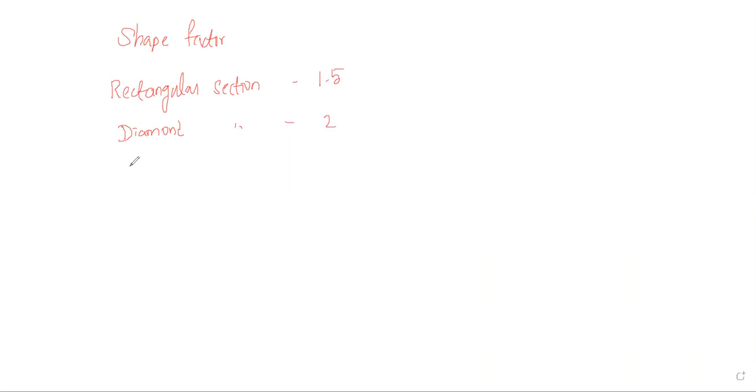Today we are going to discuss two things. One is related to shape factor. Yesterday we discussed the shape factor for three shapes. One is for the rectangular section, that is 1.5, and the second one is for the diamond section, that is 2. Then another one is the triangular section, around 2.34. Okay.

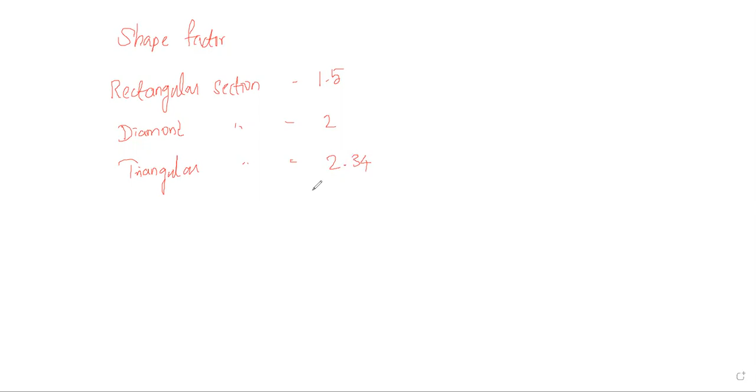Now in today's class we are going to discuss the circular section, shape factor for circular section. Consider the circular section having a diameter of capital D. The neutral axis will lie at the center of the circular section, so the centroid will be placed at y1 bar distance above the neutral axis. Similarly, y2 bar is placed below the neutral axis at a distance of y2 bar.

So CG1 and CG2. Now let us move on to the solution part. First, shape factor S is equal to plastic section modulus divided by elastic section modulus, whereas plastic section modulus ZP is equal to A divided by 2 into Y1 bar plus Y2 bar. Similarly, Z is equal to I by Y max. Here, area is equal to pi by 4 into D square. Next, the Y1 bar and Y2 bar value.

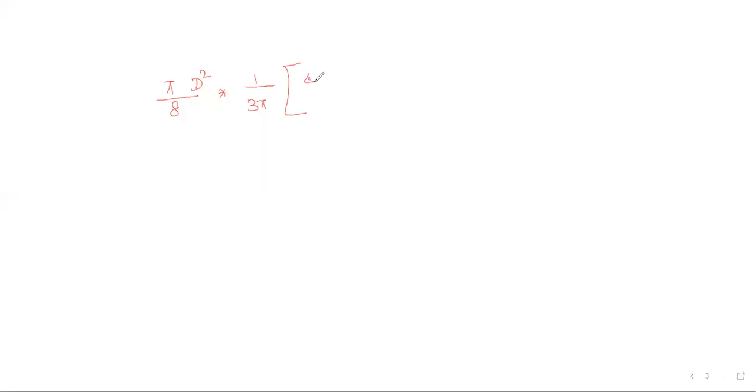Now ZP becomes pi by 4 into d squared divided by 2 into 2d divided by 3 pi plus 2d divided by 3 pi. Pi by 4 into 2 becomes 8, d squared into 1 divided by 3 pi, taken as a common term, so our value becomes 2d plus 2d, which is 4d. Pi gets cancelled. So d cube divided by 6 is the value of ZP.

Next, the Z value. Z is equal to I by Y max. Here Y max is equal to D divided by 2, whereas I is equal to pi by 64 into D power 4. This is the formula for our I value. Therefore Z becomes pi by 64 into d power 4 divided by d by 2, which becomes 32 and d cube. So the Z value becomes pi d cube divided by 32.

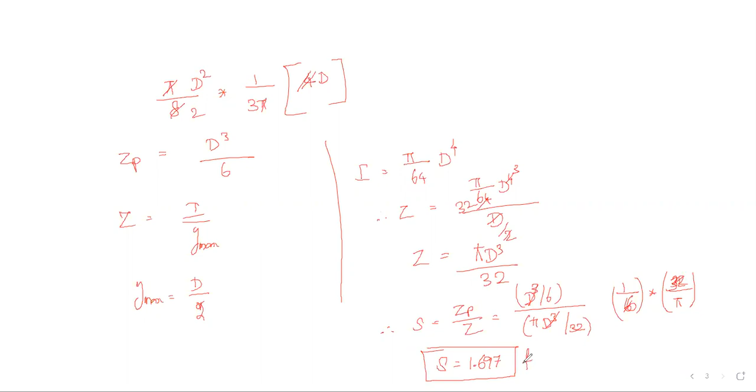Therefore the shape factor S becomes Zp by Z. Zp value is d cube by 6, and Z value is pi d cube by 32, such that d cube gets cancelled. So 1 by 6 into 32 by pi. The answer becomes 32 divided by 6 pi, which is 1.697, the value for the circular cross section. So if it is a circular cross section, the shape factor value for the section is 1.697.

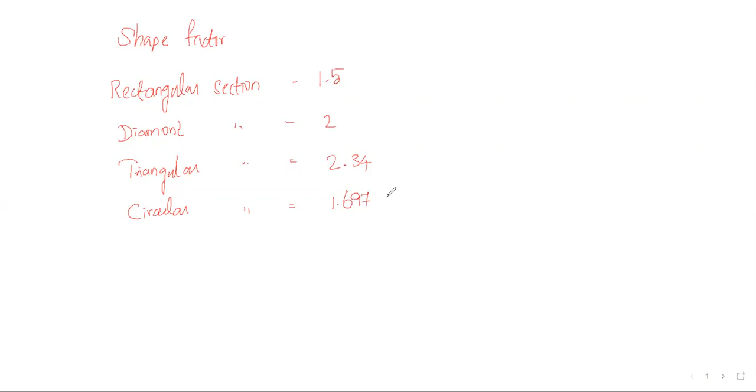Next we move on to the I section. For the I section, we will go by a problem. The given data: a mild steel I section, 200 wide and 250 deep, has a mean flange thickness of 20 and a web thickness of 10.

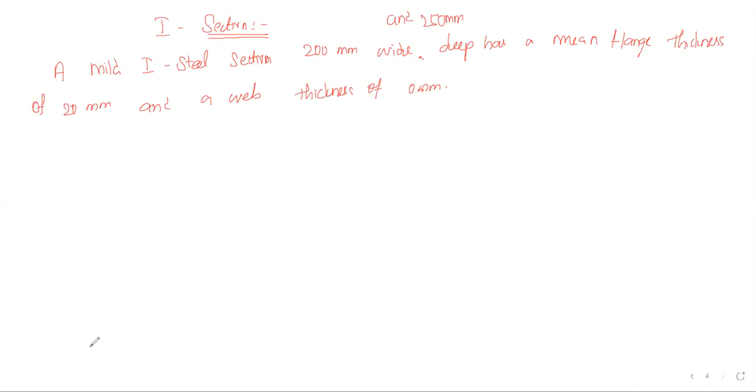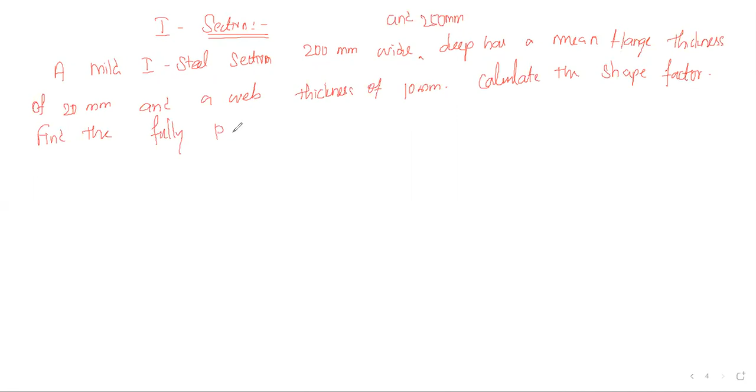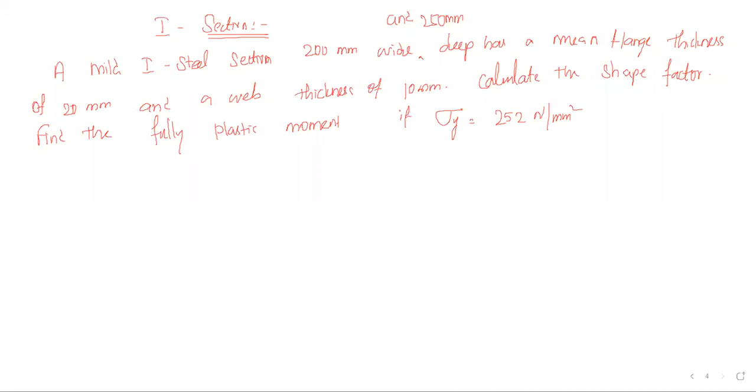Calculate the shape factor. Find the fully plastic moment if yield stress is equal to 252 Newton per mm square. So the given data are the I section; we have to draw the section details, which we will draw on the next page. Then sigma y, they have given as 252 Newton per mm square.

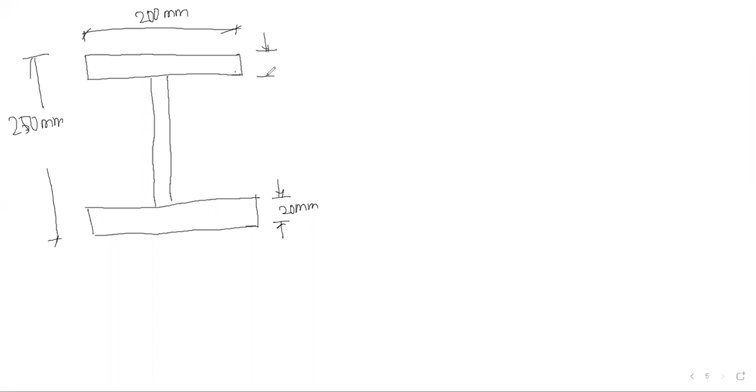So I section of 200 wide, 250 deep, and flange thickness of 20 and web thickness of 10. Okay, so 200 wide, 250 depth, 20 mm thickness of flange. So thickness of flange becomes 20 mm. Web thickness 10 mm. So this is the given data.

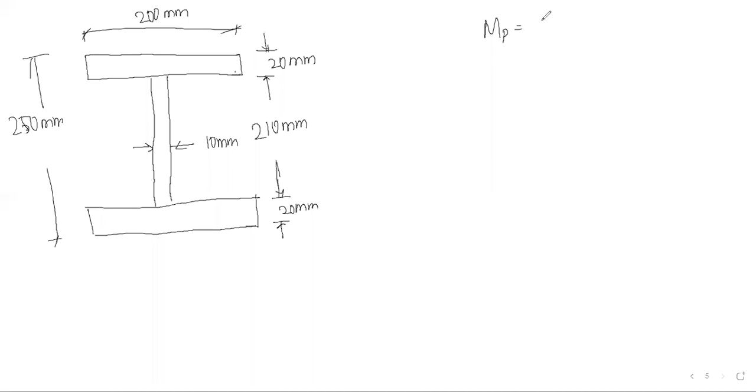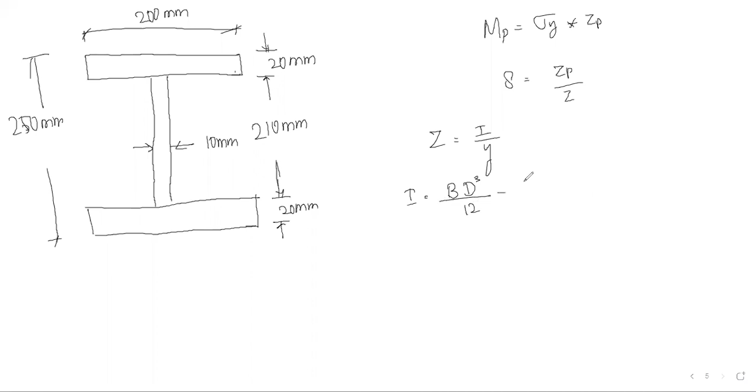For this section, we need to find out the shape factor as well as fully plastic moment. So fully plastic moment MP is equal to sigma y into ZP. Similarly, shape factor S is equal to ZP by Z. Whereas Z is the elastic section modulus. We know the formula, that is I by Y. So I for the entire section is capital B D cube divided by 12 minus small b d cube by 12.

So how am I going to calculate now? This one I am going to consider as capital B and this is capital D. And this thickness from here to here I'm going to consider as small b, and from here to here as small d. Actually, this is b by 2 and similarly this is b by 2. So total small b becomes 190 mm, and similarly small d becomes 210 mm.

Now, I is equal to 200 into 250 cube divided by 12 minus 190 into 210 cube divided by 12. So the answer is 113.784 into 10 to the power 6 mm power 4. This is the value of I for the entire section.

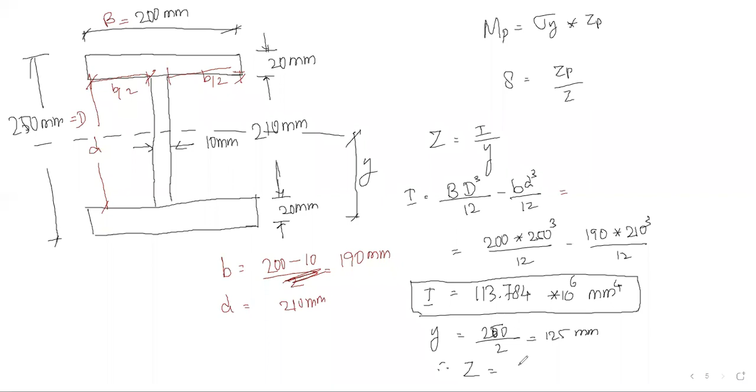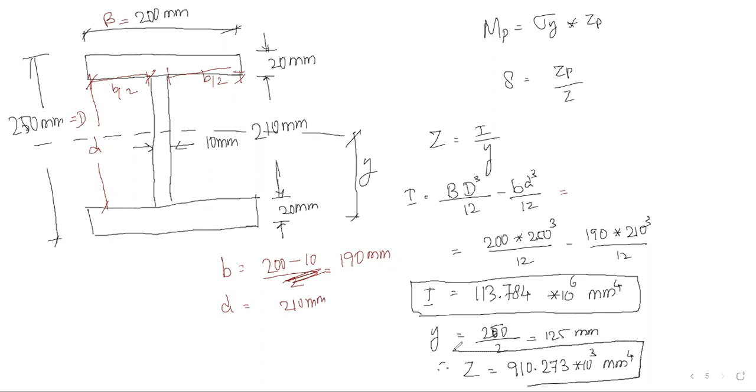And Y for the entire section is the total depth divided by 2. So Y is equal to 250 divided by 2, so 125 mm. Therefore, Z becomes 113.784 into 10 to the power 6 divided by 125. So it becomes 910.273 into 10 cube mm cube. This is the value of Z. Next, ZP. ZP is nothing but A by 2 into Y1 bar plus Y2 bar.

So area. Individual rectangles I am going to take. So 200 into 20, two plates are there, so into 2, plus 210 into 10. So 200 into 20 into 2 plus 210 into 10 becomes 10,100 mm square. This is the value of area. Next, Y1 bar and Y2 bar.

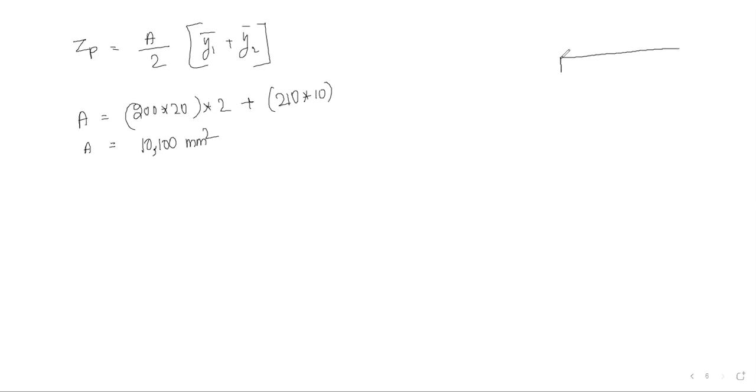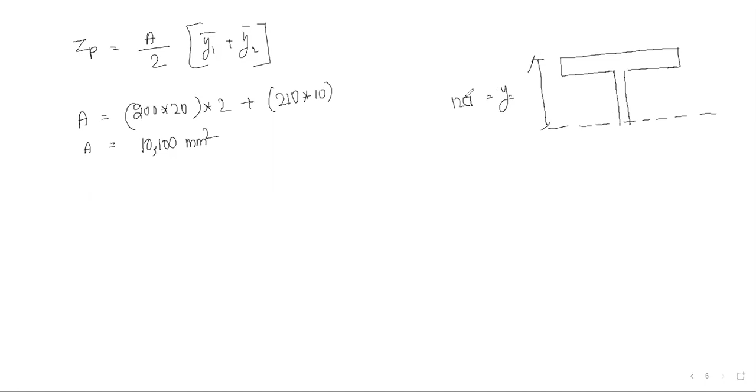The section is symmetrical with respect to its neutral axis. So the neutral axis is going to lie at the midpoint of the section, that is Y value, 125 mm. So this is 200 mm, and this is 20 mm. This is 210 divided by 2, 105 mm, and the thickness is 10 mm. Now I have to find out the y1 bar distance. y1 bar and y2 bar are similar, so we should think about the section details.

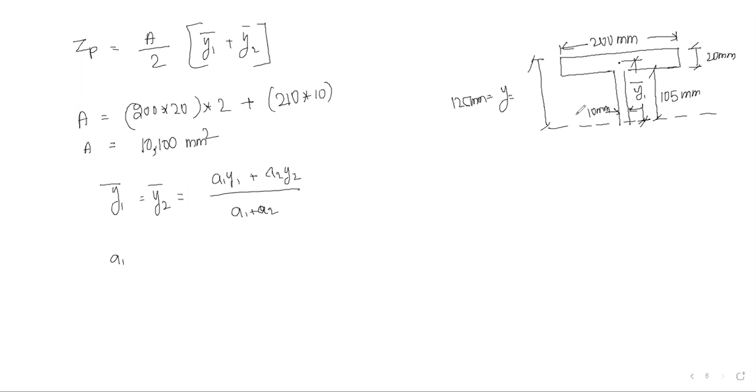So y1 bar is equal to y2 bar is equal to a1 y1 plus a2 y2 divided by a1 plus a2. This one I am going to consider as section 1, and this is section 2. So a1 is equal to 200 into 20, so it becomes 4000 mm square. Similarly, a2 is equal to 105 into 10, so it becomes 1050 mm square.

Next, y1. From the neutral axis to this position the depth is y1, and for this position it is y2. So y1 is equal to 105 plus 20 divided by 2, so it becomes 115 mm. Similarly, y2 is equal to 105 divided by 2 for the rectangular section, so it becomes 52.5 mm.

Therefore, y1 bar is equal to y2 bar is equal to 4000 into 115 plus 1050 into 52.5 divided by 4000 plus 1050. Substituting these values, I can get the answer: 102 mm is the value of y1 bar, and y2 bar is equal to 102 mm.

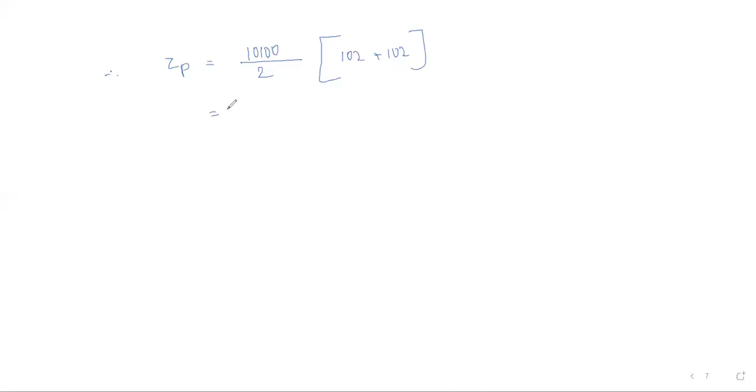Therefore, ZP becomes area by 2, 10,100 divided by 2 into 102 plus 102. It becomes 1.03 into 10 to the power 6 mm cube. This is the value of ZP.

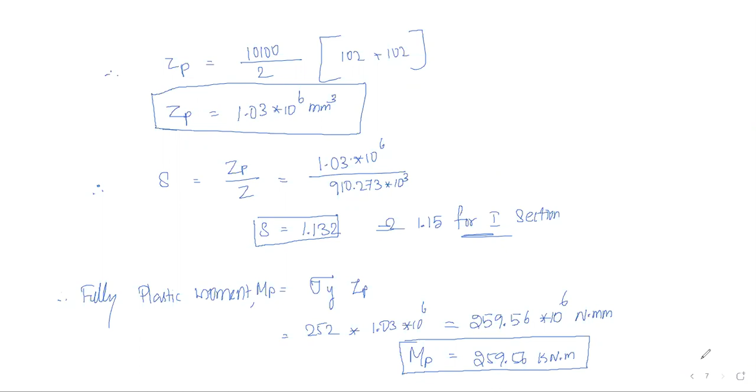Next we should move on to the topic of what is plastic hinge and what is plastic mechanism, that we are going to discuss now. Then after that we will move on to plastic analysis. Okay, so now what is plastic hinge? That we are going to discuss now.

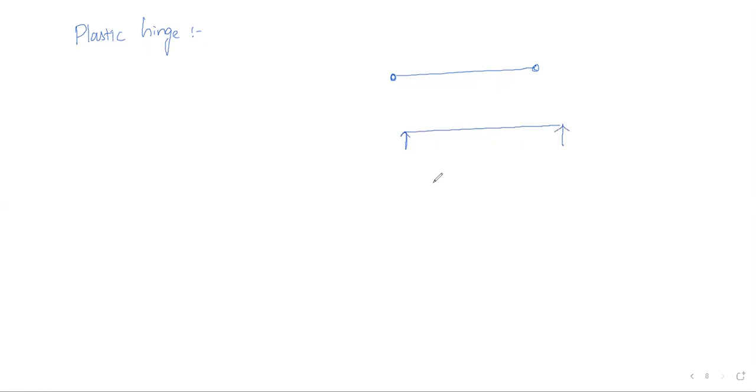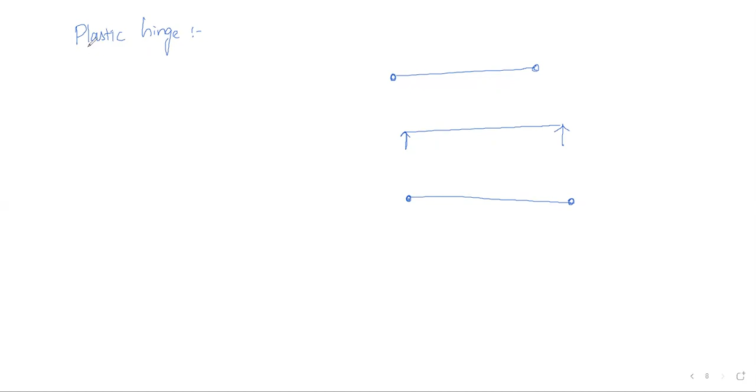As we are discussing, we are denoting the hinge like this, at the end of the support. For example, if I am having the support like this, I am going to mention the hinges like this. So what is plastic hinge and how it is created, that we are going to see. So first of all,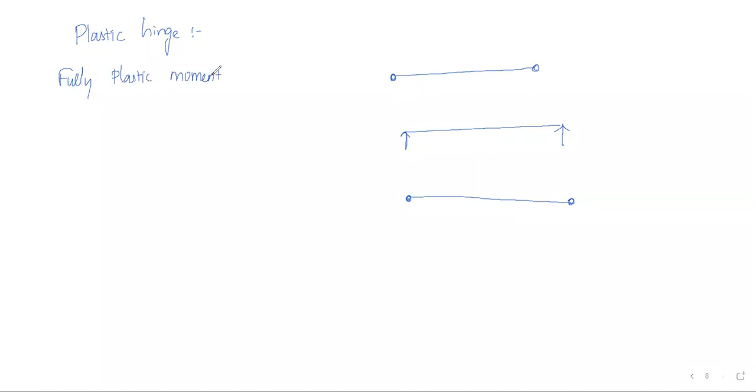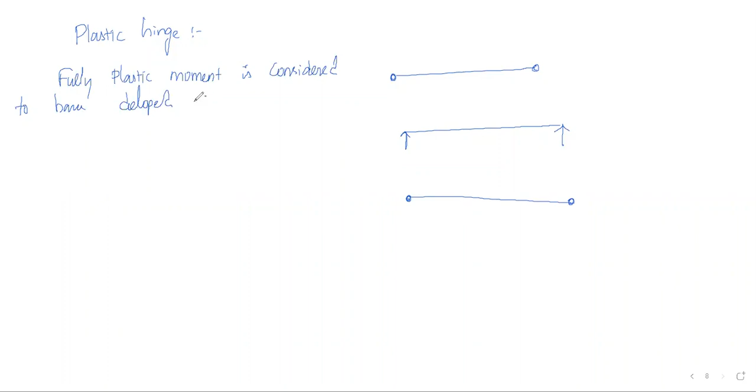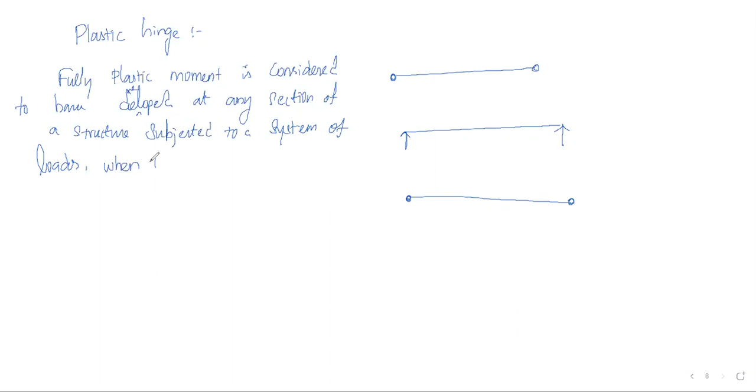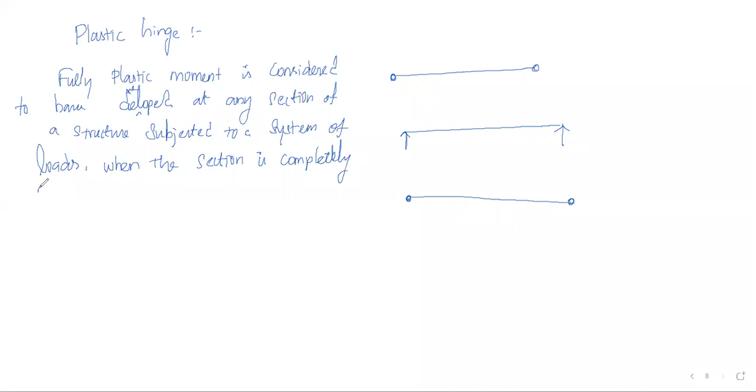the fully plastic moment, that we have discussed, sigma y into ZP, is considered to have developed at any section of a structure subjected to a system of loads when the section is completely yielded or plastified.

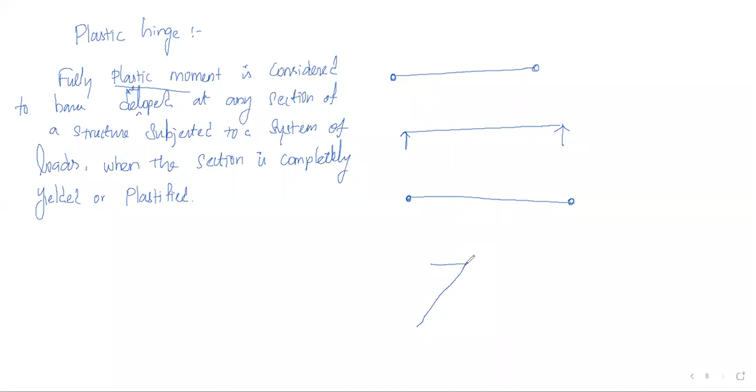So this is nothing but what we have already seen in the stress distribution diagram. Once I apply the load, the neutral axis will be here. So with respect to the neutral axis, how the section is going to deform. So my neutral axis will be here.

If sigma is less than sigma y, then it will be in the elastic state. At sigma equal to sigma y also, it is in the elastic state only. Now if it is more than sigma y, the extreme fiber gets the complete stress, that is, it reaches the yield stress. As the load increases again, the adjacent fiber reaches its maximum stresses, and so it keeps increasing.

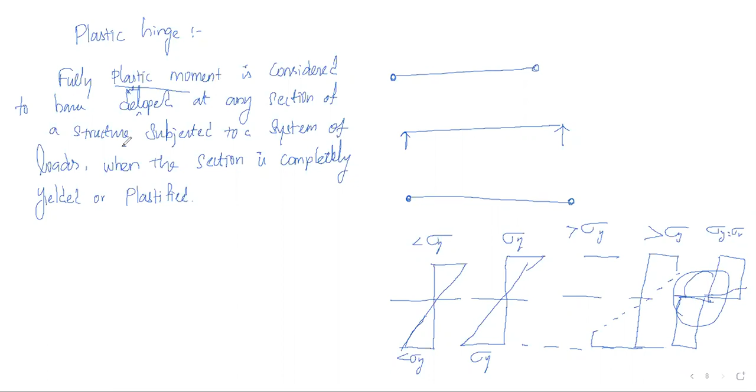Once the yield stress is reached everywhere, automatically it becomes a rectangular distribution both above and below the neutral axis. This is called the fully plastic moment, and at that time the hinge is called a plastic hinge. So consider any section of the structure subjected to a system of loads when the section is completely yielded or plastified. Completely yielded or plastified means it reaches the maximum stress.

So at that time, the fibers above the neutral axis reach the maximum stresses. Similarly, below the neutral axis, the fibers have reached the maximum stresses. At that time the section acts like a hinge. This hinge is called a plastic hinge.

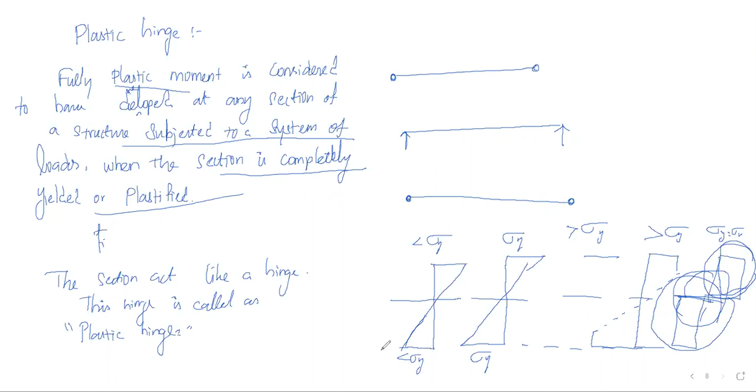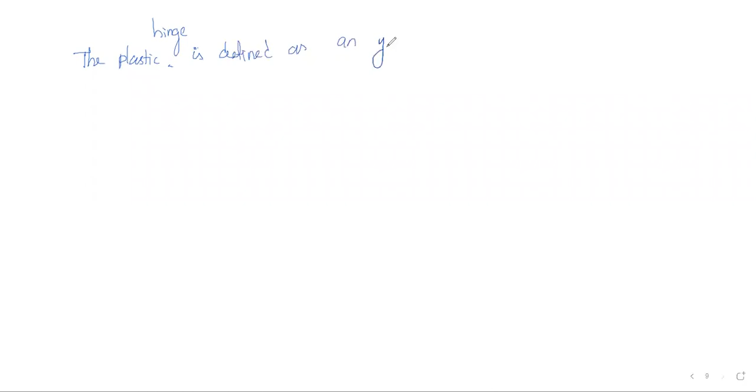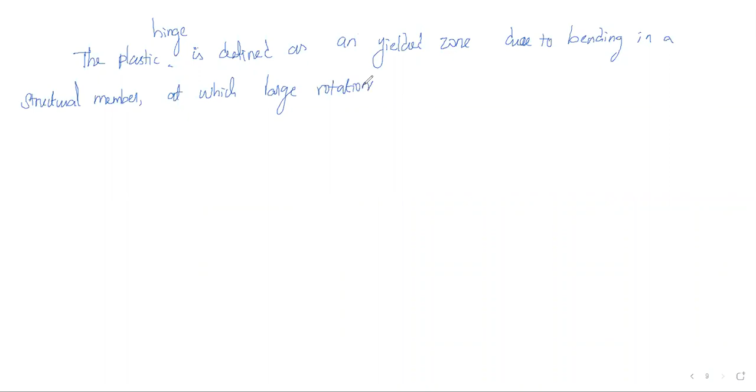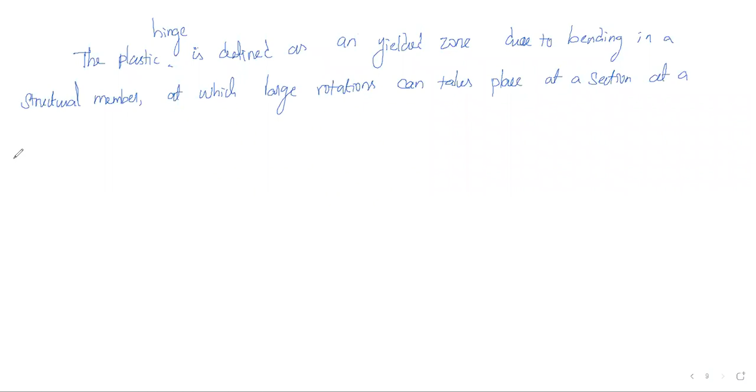In other words, we can define it like this: the plastic hinge is defined as a yielded zone due to bending in a structural member, at which large rotations can take place at a section at a constant plastic moment.

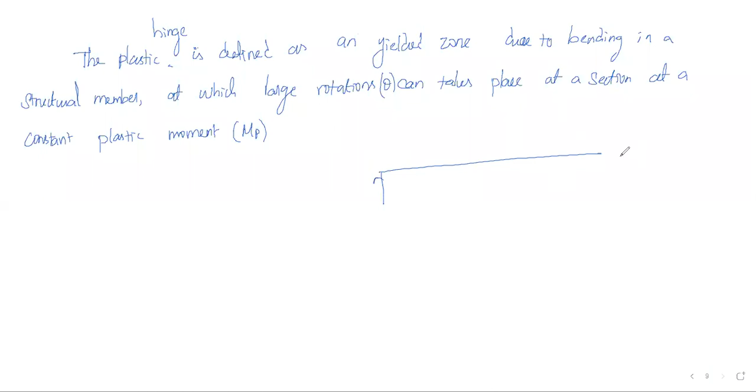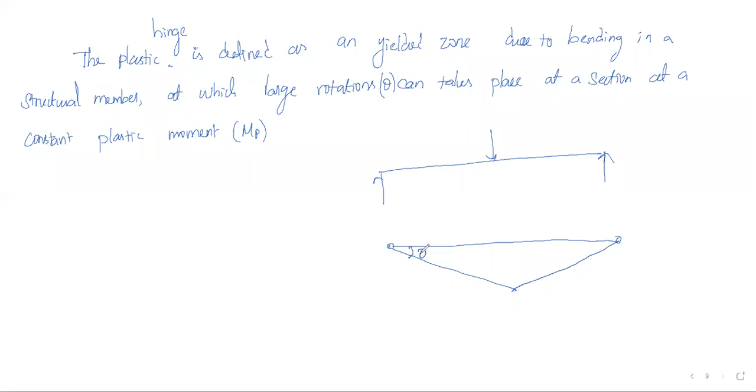So here it is MP, and the rotation is called theta. If the section is like this, then I am going to give the hinges like this. If I have the load like this, then because of this load I get the rotation like this. This rotation is called theta, and the moment here is called the plastic moment. This is what they have explained.

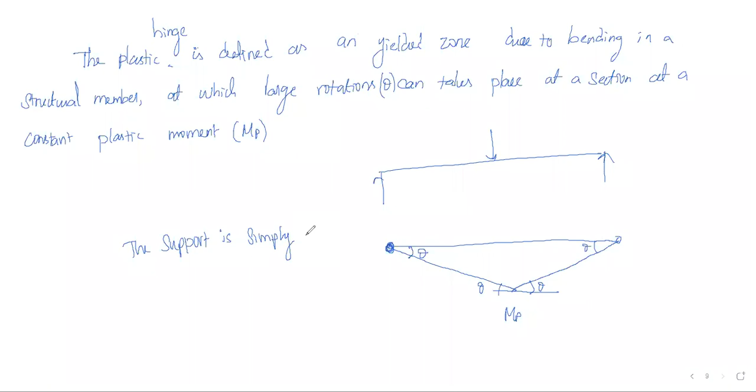If the support is simply supported or hinged, then the moment value MP at the ends is equal to 0. We all know that simply supported means the end moment becomes 0. If it is a fixed support or continuous support, then we can have the value of MP. So this we have to remember. These are the things related to the plastic hinge.

Have you got it? By using this we are going to do the problems. Now for the plastic analysis of continuous beams, as per our syllabus.